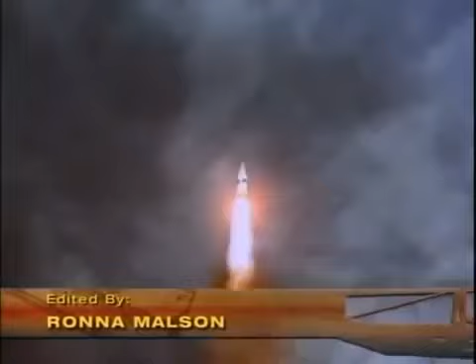It's one of the largest underground military command centers in the world, responsible for protecting the skies over North America, capable of monitoring enemy missiles around the globe, in charge of deterring terrorists in the aftermath of 9/11, and it's buried deep inside a mountain. This is NORAD, the North American Aerospace Defense Command Center.

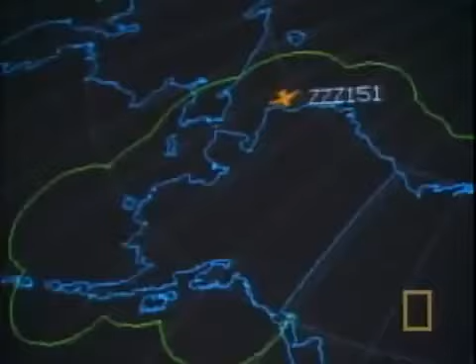Its state-of-the-art computer systems are linked to a worldwide early warning network of satellites, sensors, and radar. NORAD's mission is to track all top-secret intelligence transmitted from this sophisticated warning system. But its top priority is to use that intelligence to monitor the skies for incoming strikes against North America, assess potential threats, and coordinate a full-on military response, giving U.S. forces enough time to intercept or shoot down the enemy.

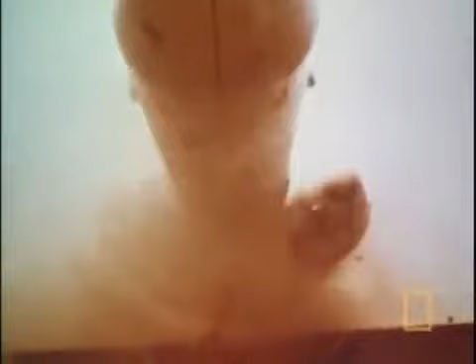Manning this megastructure, about 1,500 military and civilian employees from the U.S. and Canadian armed forces. They stand guard 24 hours a day, 365 days a year. Their motto: deter, detect, and defend. The idea for a command center of this caliber first emerges during the nuclear arms race between the U.S. and Soviet Union.

The need for NORAD becomes critically clear on August 29, 1949, when the Soviet Union detonates its first atomic bomb at a test site in Kazakhstan. America's position as the world's leading superpower is now in jeopardy. To counter the possibility of a nuclear threat from the Soviets, the United States and Canada form NORAD, which stands for North American Aerospace Defense Command.

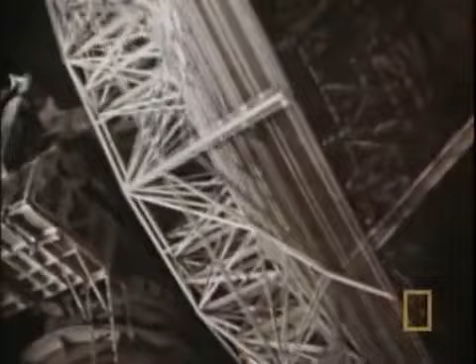By 1958, NORAD's detection system relies on a global network of 57 radar sites planted above the Arctic Circle. It's called the Distant Early Warning Line, or DEW line. But NORAD's nuclear defense has an Achilles heel: the headquarters itself. NORAD is operating out of an old hospital in downtown Colorado Springs. Although it's close to other military facilities, including a U.S. Air Force base, the building, built in 1923, is a vulnerable target.

The commander at the time said, "There's a problem here. Anybody driving by with a bazooka could knock out this command center." Military officials are forced to rethink the location of NORAD's headquarters. They need a protected site and a structure that's virtually indestructible. The Army Corps of Engineers is brought in to design this state-of-the-art military fortress.

We needed something that would be able to survive a nuclear attack, so that we could respond in kind, and the Soviets would know that, and therefore, hopefully, not attack us in the first place. The Army Corps of Engineers was the mastermind behind the Pentagon military complex 17 years earlier, and America's top-secret missile silos in the 1950s.

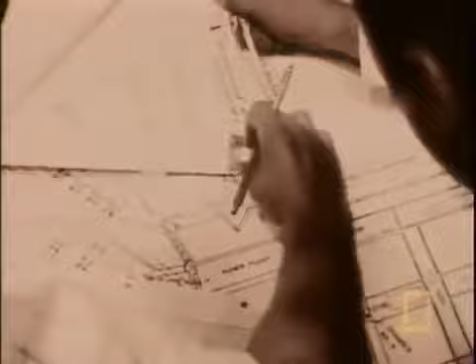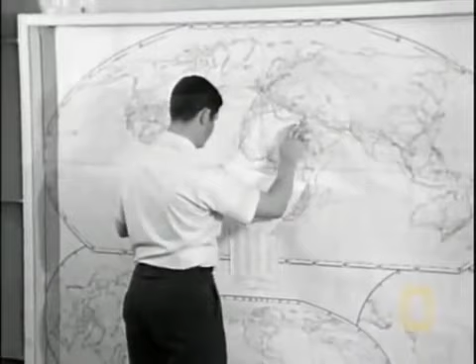But the concept for this mountain complex comes at a time when engineering technology is relatively unsophisticated and limited. In 1958, computers, as we know them today, have yet to be invented. The engineers used slide rules when they built this facility. To get started, military designers proposed 3 different locations for the megastructure. They can dig out a concrete underground bunker like those constructed during World War II. They can erect NORAD inside an abandoned mine, or they can implement their most extreme design by carving out the inside of a mountain.

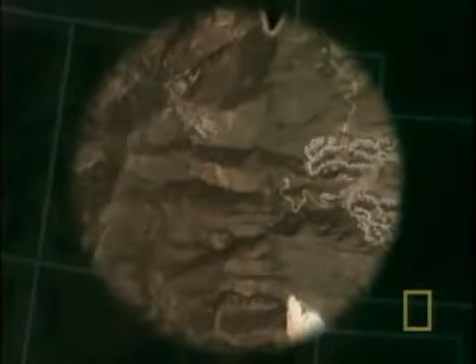2,000 feet of natural solid granite protection convinced the engineers to build NORAD deep within a mountain. The next step, find that mountain. They began the search in their own backyard, the Colorado Rockies. So engineers narrow the choice to two sites, the 9,423-foot Blodgett Peak and the 9,565-foot high Cheyenne Mountain. To select the best option, engineers must analyze rock core samples from each mountain. This process will determine which one offers the sturdiest protection for this unique underground megastructure.

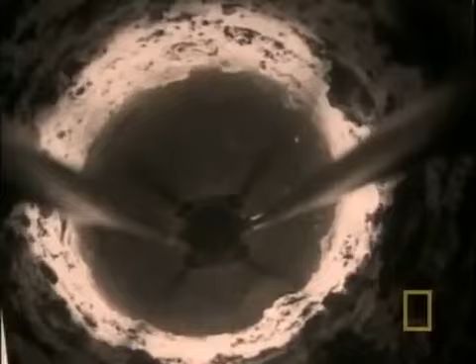Helicopter pilots are hired to transport men, generators, and the heavy core sampling equipment to the sites. At each location, survey crews drill holes 3 inches in diameter and up to 1,600 feet deep. They use a borehole camera to photograph the rock structure inside the two mountains. When they did the core samples in Blodgett Peak, they discovered that there was a lot of water compared to Cheyenne Mountain. They had much harder rock and much more consistent rock in Cheyenne Mountain.

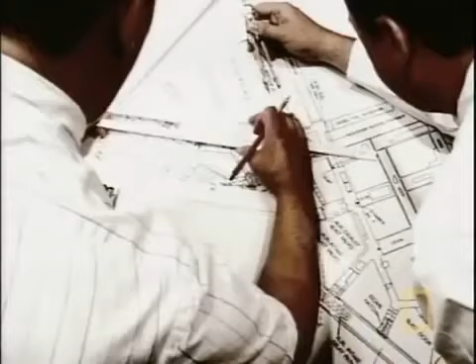Because it has a more stable rock structure, Cheyenne Mountain is selected as the future home of NORAD. Engineers must now map out the construction project. Phase 1: excavate tunnels, chambers, and reservoirs inside the mountain to create a 5-acre military installation, big enough to hold 5 football fields.

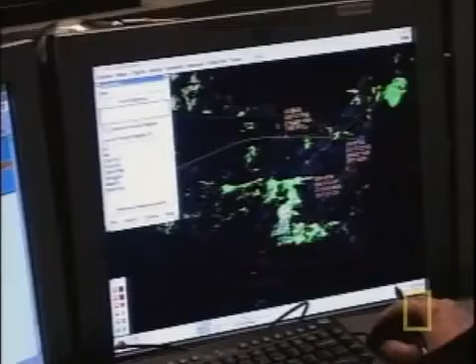Phase 2. Build a self-supporting city with 12 interlocking personnel buildings, its own water reservoirs, fuel supply, power plant, and ventilation systems. Like the Pentagon, this city will be open 24 hours a day. Staff will be stationed at roughly 800 desks and operate about 1,000 computers in an estimated 1,000 offices.

NORAD will have life-sustaining amenities like a gym, corner store, and cafeteria. Many of the building's exact details will remain under wraps due to the high security protecting this top-secret facility. But there's one characteristic that sets this headquarters apart from other megastructures: the ability to completely seal itself off in the event of a nuclear attack. NORAD must be able to function and keep its personnel alive for 30 days without any support from the outside world.

For Phase 3 of the NORAD military complex, technical engineers will install a powerful scientific computer linked to a super surveillance system capable of monitoring missile activity around the globe. NORAD is considered a Level 1 facility, and that means that this structure will have the highest operational security available. Building this military headquarters presents a challenge unlike any other that engineers of the time have attempted. 700,000 tons of granite must be excavated from inside the mountain, a weight equal to almost 4,000 commercial jets before construction of the buildings can even begin.

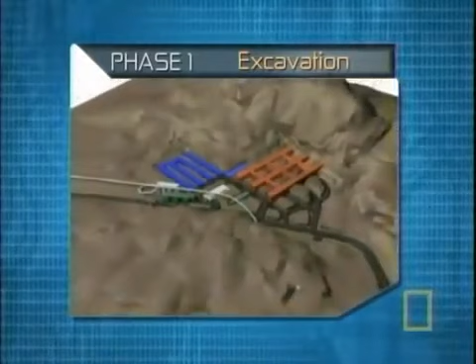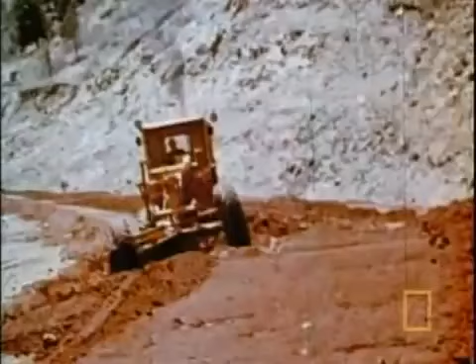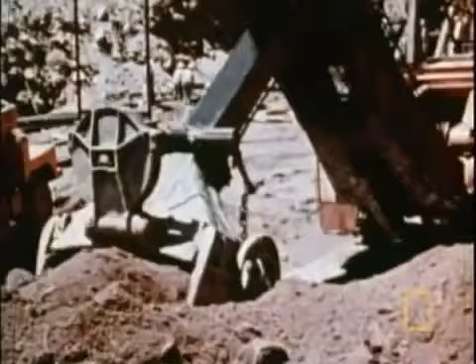By late September 1959, 2 years since the initial conception of NORAD, construction crews hit their first obstacle. Engineers have positioned the North Tunnel entrance 1,000 feet above the base of the mountain. But the site is so remote, men and machinery can't access it by land. A 4-mile-long road must be planned and bulldozed before crews can start excavating the mountain. It takes more than 2 months to complete the road, from its beginning in Colorado Springs to the endpoint 1,000 feet up Cheyenne Mountain. But by November 1959, just as the new road is almost ready to transport crew and equipment, the entire project comes to a screeching halt.

The roadblock this time? Money. Congress has not approved additional funds for NORAD. At the start of 1960, with the threat of nuclear war still a frightening reality, America's answer, NORAD, may never be built. Fire in the hole. Miners blast out tons of solid granite, risking an early grave for this stealth megastructure.

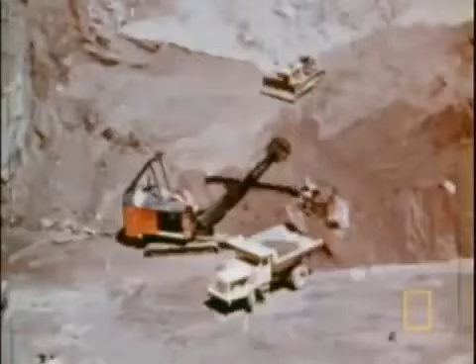November 1959. All across the U.S., Americans are living on the edge of a nuclear threat. The U.S. government is building what it believes is America's only viable solution. A top-secret military complex capable of seeing into every corner of the world. Construction crews have just enough time to finish the $1 million access road before the government shuts down the entire project. Estimates for the rest of the project are more than $26 million, and military officials are constantly updating and resubmitting NORAD's initial plans. It takes another 16 months for Congress to approve the design and funding of this underground megastructure and jumpstart the construction process.

Once the green light is given, military officials stage a highly public groundbreaking ceremony for their top secret fortress. This is a message to the Soviets that the U.S. is taking the threat of nuclear war very seriously. There was no secret. What was secret at the time, and remained secret really up until the 1980s, was exactly how hardened that facility would be. What kind of a nuclear blast could it survive? On June 16, 1961, top military officials detonate the first blast. 3 stop-and-go years after NORAD's preliminary design, construction finally begins.

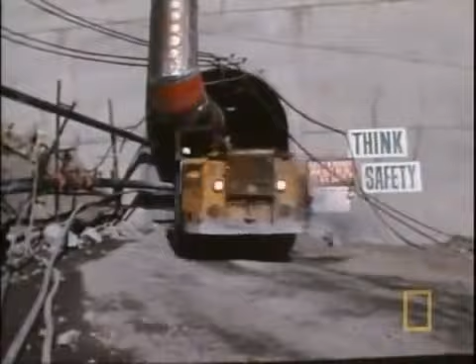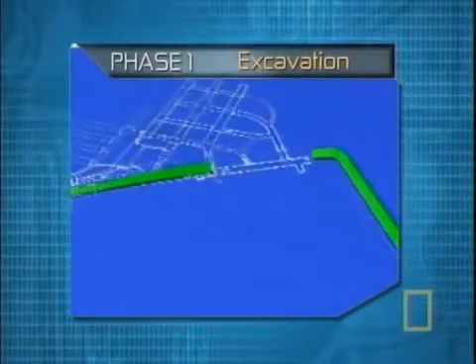It starts with a mammoth dig. A crew of just 90 workers have 1 year to carve out 5 acres and remove 700,000 tons of granite for 2 main tunnels and 7 60-foot-tall caverns, equivalent to 5.5 stories. These hollowed-out chambers will become the protective shell for NORAD's 12 interlocking staff buildings and 3 industrial structures that include a power plant. Total size, 104,980 square feet. Each tunnel will lead to those buildings from different sides of the mountain. First job for the excavation crew, blast out the tunnels.

From day one, engineers face one of their biggest hurdles: how to keep thousands of tons of rock and debris from burying the whole project. Blasting is the fastest and cheapest way to excavate granite. Miners at NORAD attempt traditional blasting techniques, where dynamite is heavily packed into drilled holes. But they soon realize this method risks fracturing and loosening the rock. In the worst-case scenario, the cavern ceiling could come crashing down on top of them. Crews must develop a more controlled way of blasting that keeps the walls intact.

Dr. Paul Worsey is a blasting expert who consulted on the NORAD megastructure. Worsey shows how the traditional blasting method used at NORAD can trigger a rock wall to crumble and cave in. All these fractures here are blast-induced, and it's really loosened up. I can even pull the material off with my hands quite easily. Now, if I could do that with my hands, just imagine what the shockwave from a nuclear weapon could do.

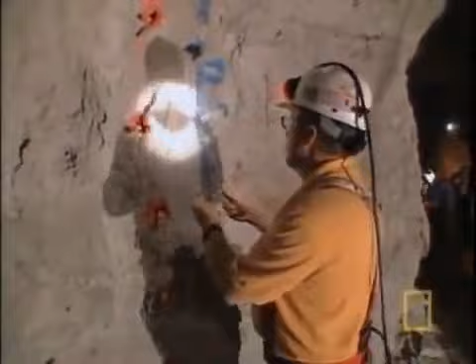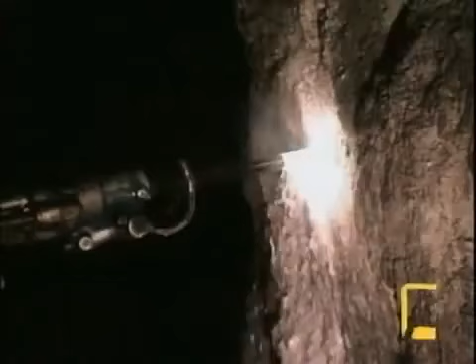To avoid a cave-in, NORAD's explosives team used a new technique developed in 1956 called smooth wall blasting. Miners first calculate a blasting pattern by painting a series of arched lines on the granite walls. Holes are then carefully drilled along those lines and packed loosely with small sticks of dynamite. Timing is crucial. Each arch must be detonated from the inside out in a precisely choreographed sequence. On the outer arches, the rock shears off cleanly, leaving behind a smooth wall.

Dr. Worsey demonstrates NORAD's smooth wall blasting technique. With everyone at a safe distance from the site, it's countdown time. Fire in the hole! 3, 2, 1! The result, no collapse. A nice, fairly smooth wall, and there's hardly any cracking on holes at all. Fewer cracks mean a more stable wall, which is exactly what NORAD's blasters and engineers finally achieved at Cheyenne Mountain in the fall of 1961.

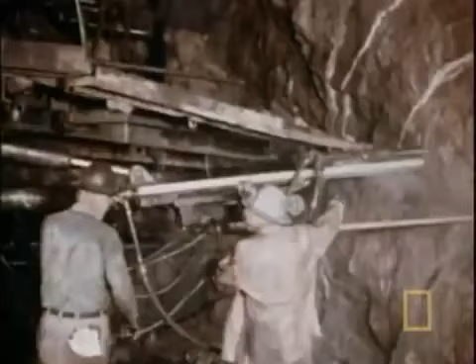If they had not used these very innovative, carefully planned mining techniques, blasting techniques, the chances of having a facility that would survive a nuclear blast would have been minimal. The excavation crews must still meet their deadline of June 1962. Blasters work in 3 shifts around the clock, 6 days a week. They must attack the mountain from both ends. The design plan calls for the 2 tunnel crews to meet at a central juncture point. There they will excavate the main cavity for NORAD's 15 buildings.

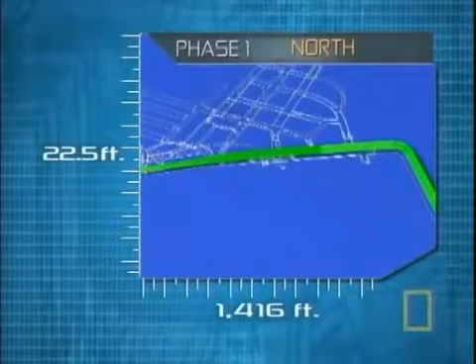On the south side of the mountain, one team bores the access tunnel for NORAD's ventilation system. It's 2,668 feet long and 17.5 feet high. On the north side, another team must blast out the megastructure's main entrance. It's a shorter tunnel, 1,416 feet long and 22.5 feet high. Blasting, digging and carving out tunnels thousands of feet through a mountain takes time. The question on everyone's mind, can the command post be built before a Soviet attack?

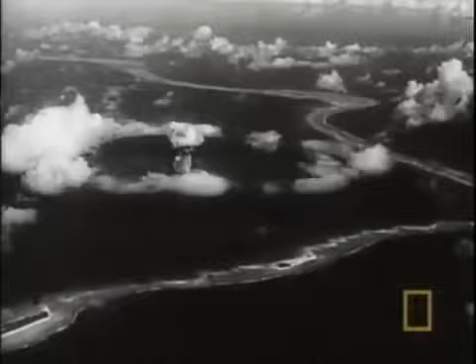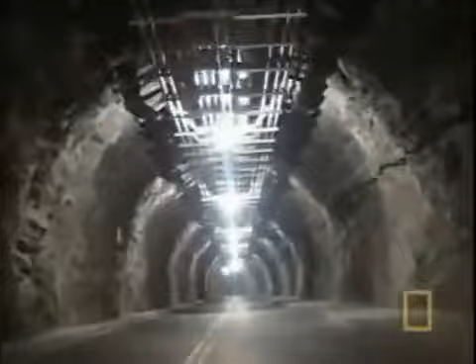On August 13th, 1961, the Soviets start to build the Berlin Wall. 3 weeks later, they begin testing a whole new generation of nuclear bombs. For the workers at NORAD, it's a race to deter a hostile superpower. Just 3 months after their start date, workers hit a milestone. On October 7, 1961, crews from the north and south tunnels meet. Together, they've carved through 4,675 feet of solid granite. It is a monumental achievement.

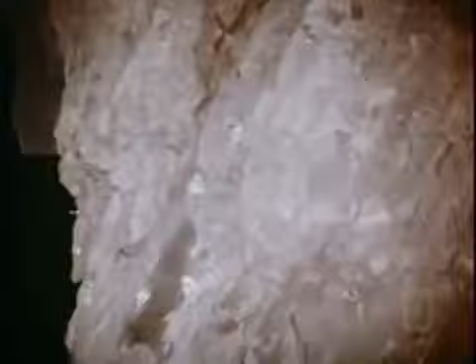Yet the tunnels are just the road to the main event: digging out NORAD's 7 central chambers. It's the toughest job so far. The crew has just 8 more months to finish the entire excavation phase of the NORAD megastructure. A daunting task. But in the heart of the mountain, where those chambers are being hollowed out, engineers hit another major obstacle. Rock boring samples of the granite reveal a critical flaw in the cavern's roof that threatens to derail the entire multi-million-dollar project.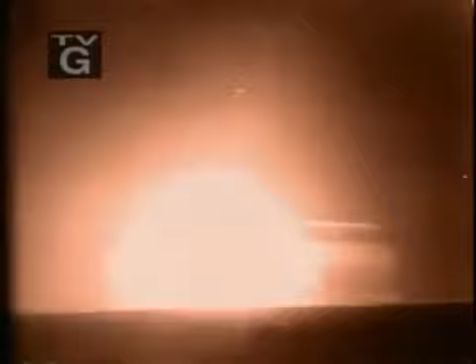October 30th, 1961, the Soviets test the most powerful atomic weapon ever built, a 57-megaton Tsar Bomba. Nearly 4,000 times more powerful than the bomb dropped on Hiroshima 16 years earlier. The blast has repercussions halfway around the world, at Colorado's Cheyenne Mountain, where engineers are building a top-secret command post secure enough to survive a nuclear blast.

Working around the clock, construction crews have carved out more than 6 million cubic feet of rock for NORAD's 7 central chambers. But 3 months into the dig, engineers uncover a dangerous weakness in the mountain's geological structure. Huge fractures above the 3 main chambers could cause the entire cavern to collapse from the vibrations of a small earthquake. Engineers must address this new risk or terminate the entire project.

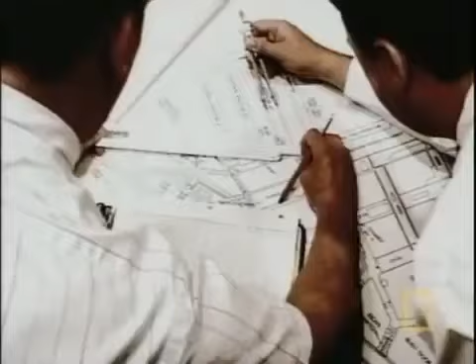It's back to the original blueprints and a radical proposition. Engineers decide to rotate the chambers 70 degrees and reposition the entire excavation project. In this new design, the cracks over the future buildings are now shorter, minimizing the effects of an earthquake or nuclear blast.

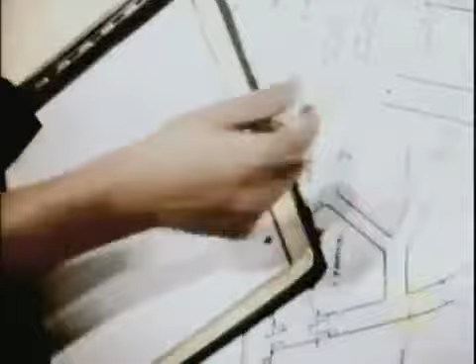If they had not changed from the original plan for that portion of the excavation, it's likely that A, you would have had problems with caving rock, or B, if there had been a nuclear attack, the vibrations to the entire mountain would cause that to collapse.

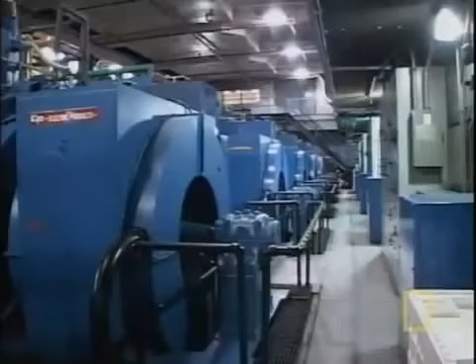With the revamped design, construction crews are now ready to carve out the 5 reservoirs. 4 of the reservoirs will hold a total of 6 million gallons of water, enough to fill more than 20 Olympic-sized swimming pools. A 5th reservoir will hold 500,000 gallons of diesel fuel. The surplus will run the 6 generators that provide NORAD's power.

With the reservoirs completed, construction crews are just a few months away from their June 1962 deadline for excavation. But soon the mountain's natural elements present another challenge for NORAD's blasters. Engineers discover that large sections of the mountain are filled with water. So much, in fact, that miners can't possibly pump it all out. Too much water is a nightmare for blasters, creating fractures in the rock. Miners have no control over the way fractured rock explodes.

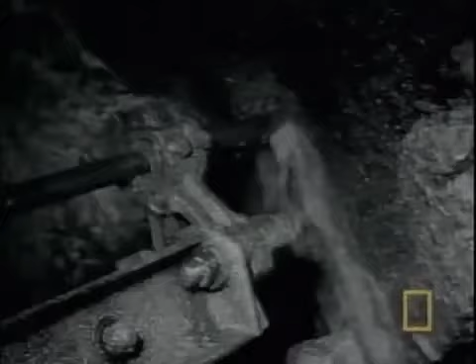Miners are forced to find another type of explosive. They try out a compound called slurry. Made from ammonium nitrate, slurry can be molded to fit any crevice, so it can fill a hole that is cracked.

But blasting away tons of rock weakens the mountain structure. Engineers decide to secure NORAD's unstable granite roof with giant steel rods called rock bolts. Measuring from 6 to 32 feet in length, these metal dowels will provide critical structural support. Rock bolts are really important in tunneling because they're a method of stabilizing the roof. We actually pin loose pieces of roof to stabilize them.

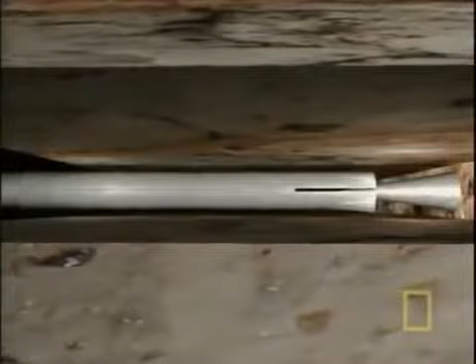Workers install the steel rods into the walls and ceilings of the chambers. The tip of the bolt has an 8-inch split that holds a steel wedge. Compression drives the wedge into the steel rod, spreading its tip and anchoring the bolt against the surrounding rock. Crews insert bolts 4 feet apart throughout the chambers and tunnels. Each bolt is tightened against a steel plate on the surface of the rock.

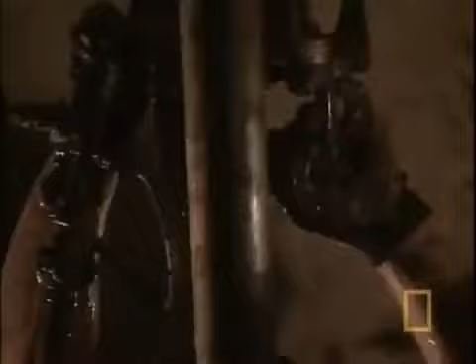As miners continue to carve out more chambers, they uncover another natural element that is weakening the rock cavern around them. Volcanic rock called basalt. Softer than granite, basalt will deteriorate and fall apart when exposed to air. Miners decide to spray the rock with a concrete mixture called gunite. It hardens into a solid wall that prevents the basalt from deteriorating.

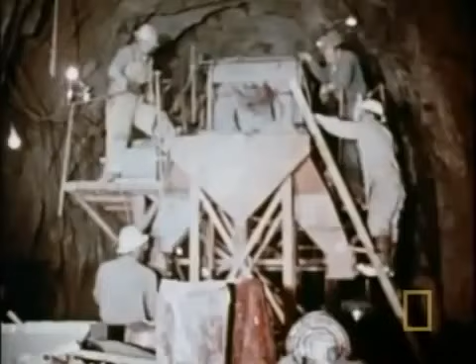With all these unexpected complications, the construction crew struggles to stay on schedule. People were working 6 days a week, basically around the clock, and they knew that national defense, possibly national survival, depended on doing this job quickly and doing it right. Finally, on June 18, 1962, just 2 days after their deadline, workers finish the dig. Phase 1, excavating the mountain, is complete.

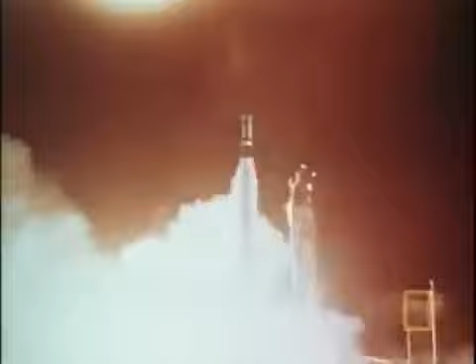Almost 1 billion pounds of rock have been removed from Cheyenne Mountain. Enough to fill 23,000 dump trucks. 8 months later, engineers are ready to start Phase 2 of this monolithic megastructure. Constructing NORAD's 12 personnel buildings and 3 industrial structures. 6 generators and a complex ventilation system must also be installed inside Cheyenne Mountain. But their plans are suddenly turned upside down by unexpected fallout from a dangerous new weapon.

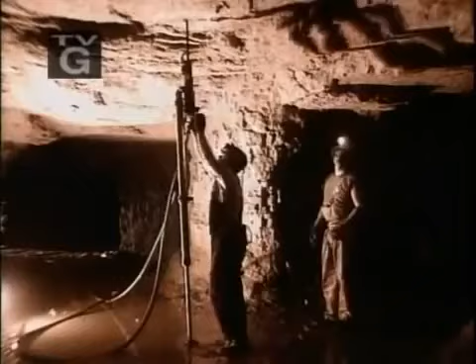July 1962. Construction crews working 2,000 feet inside Colorado's Cheyenne Mountain have carved out more than 5 acres of granite to make way for one of the most important megastructures in military history. The NORAD Mountain Fortress will be America's first line of defense against enemy threats. Phase 2 of the project is ready to begin. Engineers have already designed 15 buildings that can withstand a nuclear blast. But new advances in weapons technology are threatening to neutralize the whole project.

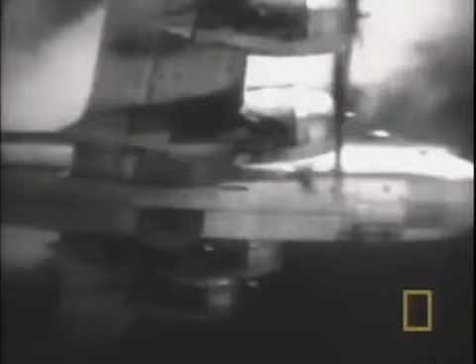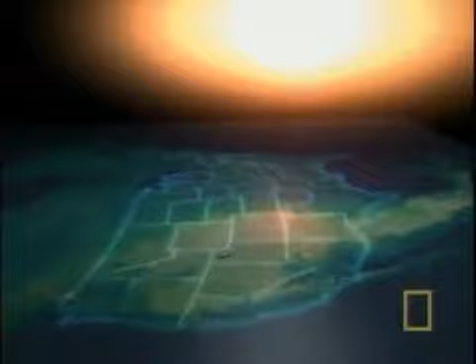On July 9, 1962, more than 200 miles above the Pacific Ocean, the U.S. detonates a high-altitude bomb in a nuclear weapons test. An unexpected byproduct of this explosion is a newly discovered phenomenon called an electromagnetic pulse, or EMP. An EMP generated 200 miles above Kansas could cripple the entire United States by preventing electronic devices from functioning. And NORAD depends upon electronics operating around the clock to successfully accomplish its mission of surveillance.

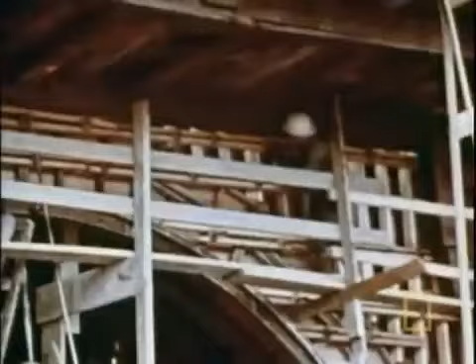Back at Cheyenne Mountain, engineers realize that thousands of feet of granite offer zero protection against an electromagnetic pulse. The one object that will ward off the destructive pulse is metal. Like a lightning rod, metal directs the electromagnetic pulse to the ground. But shielding all of NORAD's wires and computers in metal is impossible. A single gap in the shield, and the pulse could short out the entire complex.

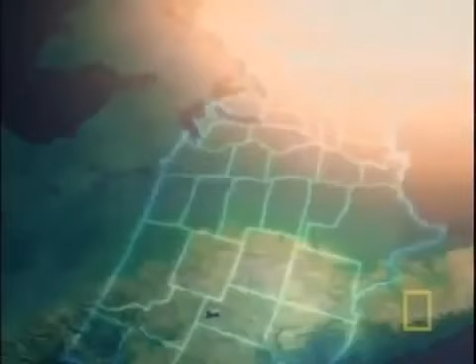Just as engineers prepare to erect NORAD's buildings in February 1963, they brainstorm the solution. Construct the buildings entirely out of metal to ground the path of the pulse. Thick steel walls are brought inside the structure in sections, the only way to fit them through the tunnel opening. After they're inside, they're welded together at the seams. These steel walls will protect NORAD's sensitive electronic systems by transferring an incoming electromagnetic pulse through the metal to the ground, where it will be absorbed and neutralized.

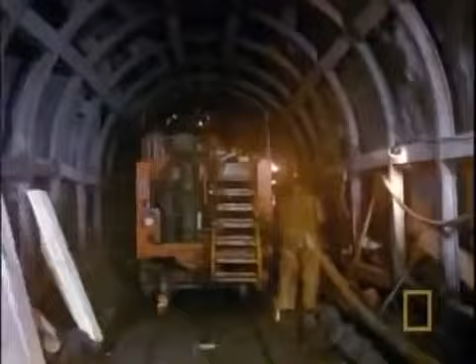Actual construction on NORAD's steel buildings starts in March of 1963. But 7 months later, the engineers hit another wall. They determine that a geological fault in the roof of the main chamber will not withstand a nuclear detonation. They thought this problem had been solved when they pivoted the planned structure almost 2 years ago during the excavation phase, but they were wrong. Even though they reoriented the complex, there was still a crack over a part of that complex, and that caused a great deal of concern.

Under this crack is the proposed site of NORAD's most important building, the command center, home to crucial monitoring and surveillance systems. So engineers come up with a new plan. They will install a giant concrete shell, 50 feet in diameter, just inches below the main chamber's granite ceiling. Its purpose? To protect NORAD's future 3-story command center from being buried by tons of crumbling rock.

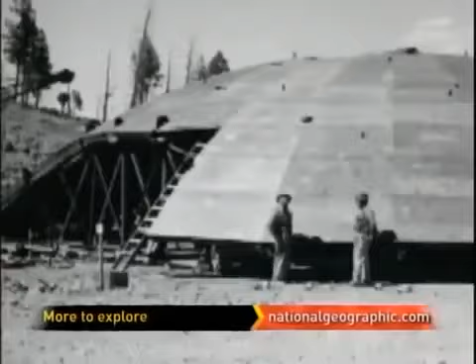The enormous dome, ranging from 4 to 14 feet thick, is made from steel-reinforced concrete. It will be supported by 4 massive 3-story high concrete columns. It's so large that it has to be fabricated outside the mountain and transported through NORAD's tunnel entrances in pieces. Workers use hydraulic jacks to reassemble it inside the mountain, lifting it into place on top of the columns. To stabilize it further, the dome is fused to the cavern ceiling. 6 months later, the dome is assembled and in place. The construction of NORAD's main buildings is now the top priority.

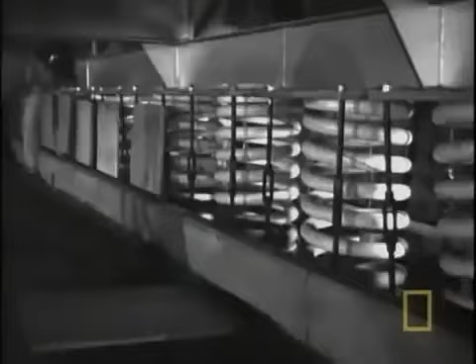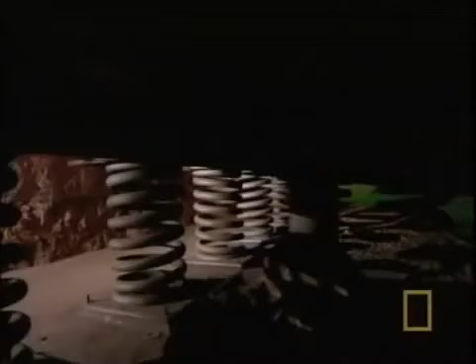But there is still another menacing phenomenon to tackle. In a nuclear blast, the mountain would transmit shock waves directly to the buildings, injuring people and damaging sensitive computers. To combat these waves, engineers come up with their own version of shock absorbers. Giant springs 3 feet tall, nearly 2 feet wide, and weighing half a ton each. 1,319 springs will protect NORAD's buildings from any shock wave. No other structure has ever employed such an innovative shock absorption technique. It's a first in engineering history.

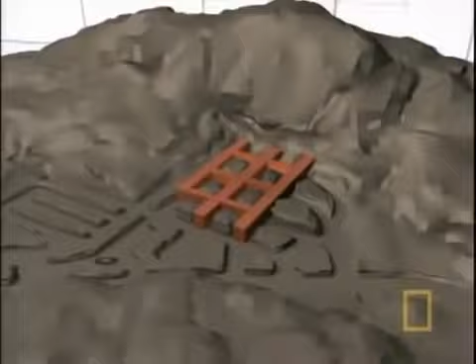Step by step, work on the rough steel structure of NORAD's interior buildings continues. When complete, each building will be interconnected, forming a basic grid pattern. It is inside this building, the Combat Operations Center, that technicians will eventually install the brains of NORAD, its global surveillance system. In adjoining buildings, workers construct other features of this megastructure, including a medical clinic and convenience store.

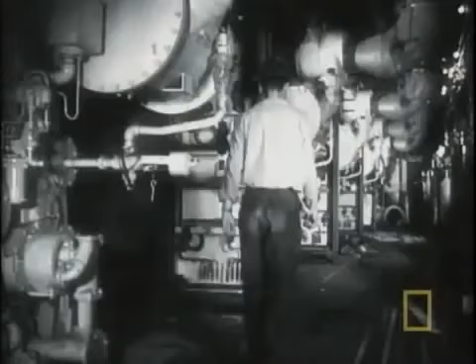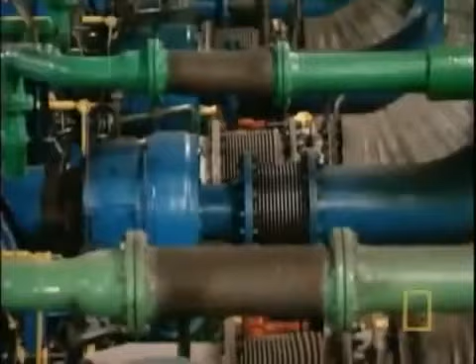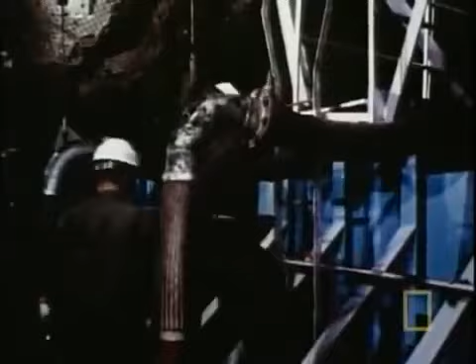It's April 1964. Workers are 14 months into Phase 2 of the project, NORAD's self-supporting city. 15 buildings are complete. Crews now begin work on the support systems. First, they build the power plant that will run the entire command post. The guts, 6 turbocharged diesel engines, the same kind used to power a battleship. Together, they can generate 10 megawatts of electricity, enough to power more than 1,000 households. Next, crews load fuel and water into the 5 reservoirs they've already carved out. One reservoir holds 1.5 million gallons of water for drinking and cooking.

It's been 3.5 years since NORAD's first official blast of dynamite. During this time, workers have overcome all kinds of obstacles. But the NORAD facility still lies vulnerable to one lethal menace: radiation from nuclear fallout. With plenty of brawn, it's time to add the brains. NORAD gets wired with state-of-the-art technology. And now, the conclusion of NORAD on megastructures.

By early 1965, the first 2 phases of the NORAD Command Center are near completion, with tunnels, interlocking buildings, 4 water reservoirs, a fuel supply reservoir, power plant, and ventilation system. Before the 3rd and final phase can begin, installing the technical equipment that will be the brains of this military megastructure, one last detail must be addressed.

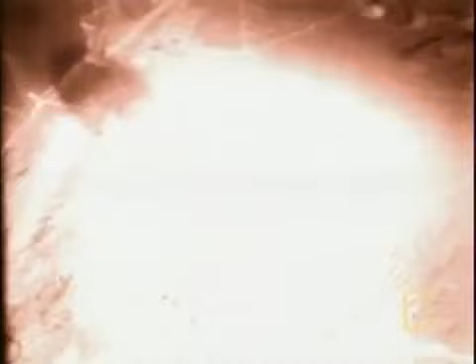In the event of a nuclear explosion, damaging shockwaves and thermal radiation can enter NORAD through 3 routes: the air intake delay ducts and the 2 tunnels. The tunnels are designed as blowaway areas. Shockwaves would travel in one way and out the other, but the air ducts lead directly into the NORAD complex. If a thermonuclear shockwave gets through these ducts, it could destroy the buildings.

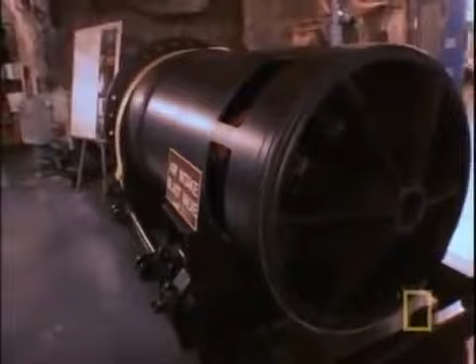The solution? Create a safeguard called a blast valve. NORAD has 58 of them, weighing in at 8,500 pounds each. Inside this 4-foot wide tube is a movable seal that opens and closes the valve. When a nuclear blast goes off, it creates a change of air pressure. In less than half a second, NORAD's blast valves will automatically seal the air intake ducts leading directly to the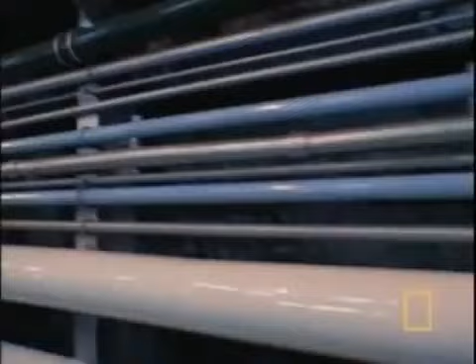facility. The contaminated air is then forced to go through a filtration system called a CBR filter. The fresh air that comes in is forced through those filters where we ensure that no radiation, no chemical agents or biological agents could get through into the complex.

There is one more weakness at NORAD that engineers need to address: the entrance doors into the complex. Located along the tunnels, they must be able to seal off the facility during a nuclear blast. For this, engineers borrow a different design. The inspiration for their solution: a typical bank vault door. Engineers create a mega version they call a blast door. 3.5 feet thick and weighs in at 50,000 pounds.

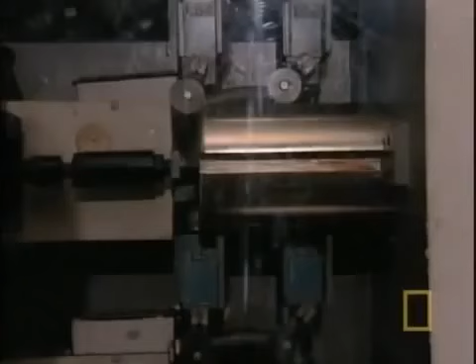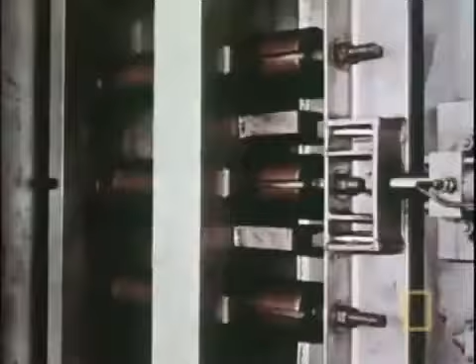Hydraulic motors push a series of steel pins into the door frame for a lock more secure than any bank vault. Like the blast valves, the blast doors close automatically when a nuclear explosion creates a change in air pressure. With a lockdown system in place, NORAD is now equipped to seal itself off in the event of a nuclear war. The complex will stock enough water, fuel, and food, including 72,000 meals, to continue its mission for a full 30 days without any help from the outside.

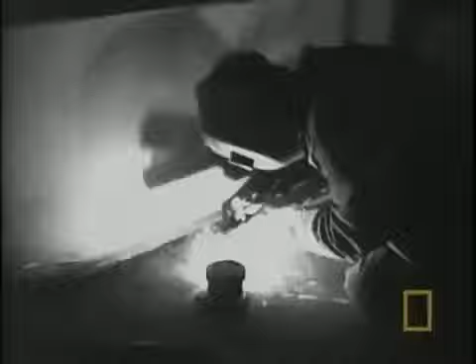By late fall 1965, all of NORAD's 15 buildings are assembled. The first 2 phases of construction are completed. It's time to launch the final phase of the project, installing the early warning and surveillance system inside the command center of the new NORAD megastructure. Although the details of this intelligence are classified, NORAD makes no secret about its primary mission: to track aircraft and missiles launched by known or suspected enemies. It's up to those manning this megastructure to identify any airborne weapons entering North America's airspace.

Phase 3 has been a massive undertaking. Computer experts are in a constant race against advancing technology. But by the start of January 1966, the job is done. A Philco 200S computer is installed at NORAD's Command Operations Center, one of the fastest scientific supercomputers of its time in the world. The brains of NORAD are up and running at Cheyenne Mountain.

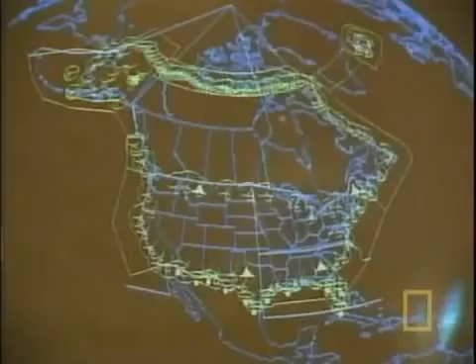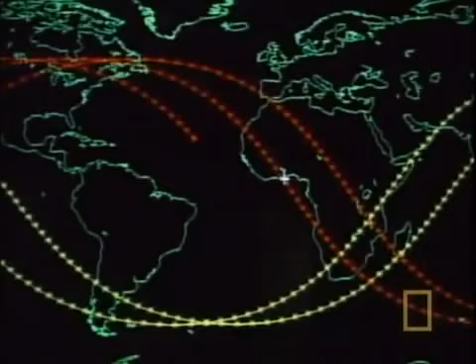As the world situation changes, so does the mission of NORAD. NORAD now expands its mission of global surveillance to include missile threats from rogue nations like North Korea and Iran. Soldiers watch and warn of missile attacks from terrorists anywhere in the world. It's a mission that depends upon a complete overhaul.

It'll be like a Volkswagen. It always looked the same for years and years, but they kept fine-tuning the engine. They would change some things on the inside, etc. Well, that was what they said about the mountain. The mountain will always look the same from the outside, but we'll be fine-tuning it and changing it on the inside to adapt to current needs. Needs that require the brains of NORAD, its top-secret supercomputer, to be constantly upgraded and updated.

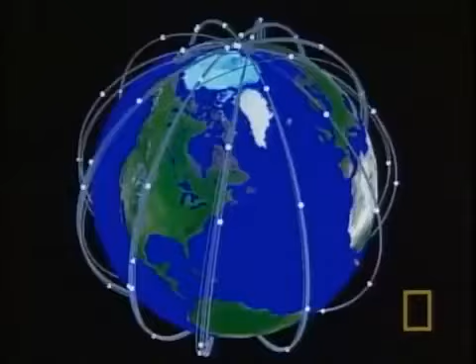Even though NORAD surveillance systems are powerful enough to detect a 4-inch-long object in the Earth's orbit, that did not prepare the command post for the tragedies of September 11th, 2001. On the morning of 9/11, we received intelligence that there might be an airliner specifically headed for Cheyenne Mountain. We closed the blast doors that day. The attack on NORAD turned out to be a false alarm, but the terrorist attacks of 9/11 forced NORAD to update its role and mission once again.

It's imperative they revamp the center to prepare for, and more importantly, prevent unpredictable acts of violence from future terrorism. The threat has become much more asymmetrical, and by that I mean terrorism is out there now. The threat is no longer a bear, but it's a ball of snakes.

On March 4th, 2005, NORAD officials unveiled their largest renovation since the mountain fortress first opened in 1966. Their newly refurbished command center. It was rebuilt within the existing rock chamber, carved out more than 4 decades ago. What you're about to see will show you we no longer need Hollywood to make our mission appear state-of-the-art and functional for its missions. Ladies and gentlemen, it's our pleasure to announce we are now officially open for business. This $15 million project took 17 months to build and doubled the command center size.

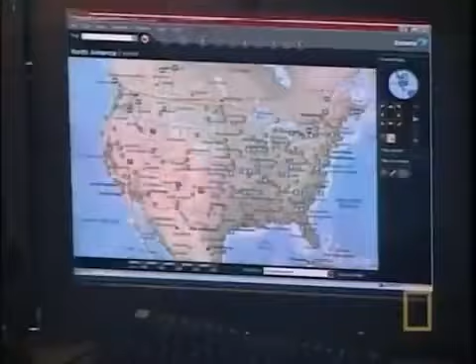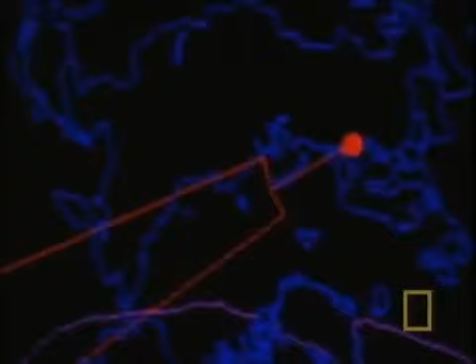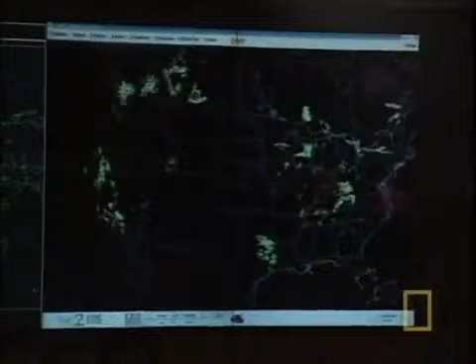Officials now keep an even closer watch over the skies above the homeland. Every day, more than 10,000 aircraft are in the air over the U.S. at one time. Ever since the unforeseen airborne attacks of 9/11, any one of those planes could be a lethal weapon. We are the agency of last resort, and we really don't want to be involved, and if we are, then it's gone too far already. That said, a quiet day here is a good day for us.

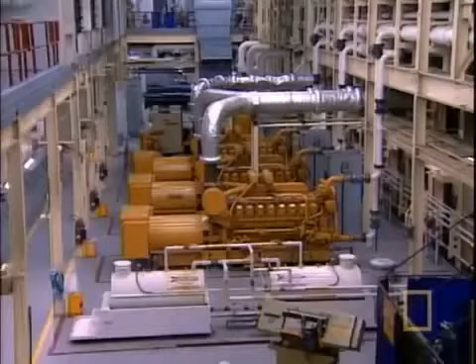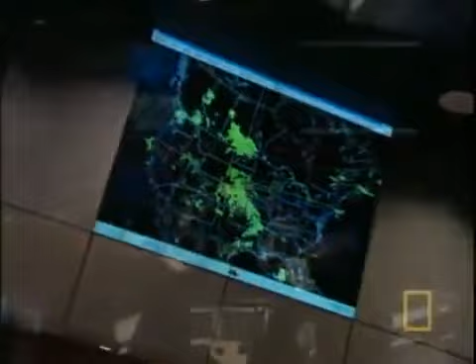NORAD's mountain fortress was built to pass the ultimate test, to survive a nuclear catastrophe. A test it may never face because it fulfilled its mission so well. This is the most secure place you can be anywhere in the world. A remarkable claim for a stronghold almost 40 years old. The engineers who designed it had a unique vision: to build a garrison where people could see out into every corner of the world, but where no one could see in.

Hidden beneath 2,000 feet of solid granite, this military complex has faced many challenges over the years, including the rapid progress of computer technology, the unpredictable nature of an almost 2-mile-high mountain, and the persistent threat of random acts of terrorism. In the end, NORAD has kept pace with the cutting-edge advances in global warfare. This modern military megastructure keeps a constant watch over the world and America's safety.